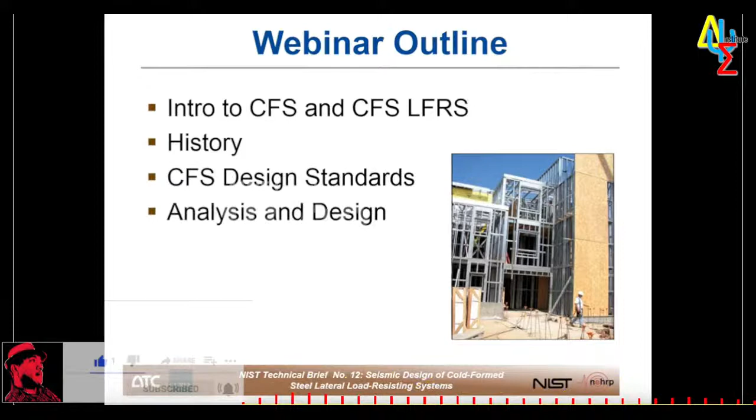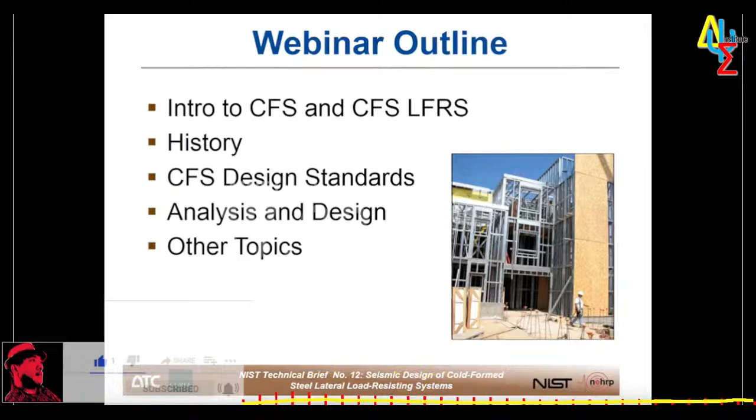Today I'm going to provide a brief introduction to CFS and CFS lateral force resisting systems. We'll talk a little bit about the history of CFS, we'll outline standards, and a good portion of the discussion today is going to be about analysis and design of CFS seismic force resisting systems, which is the main topic of TB12. Other topics that might be of interest to engineers and others, and as we go along, we'll have question and answer sessions.

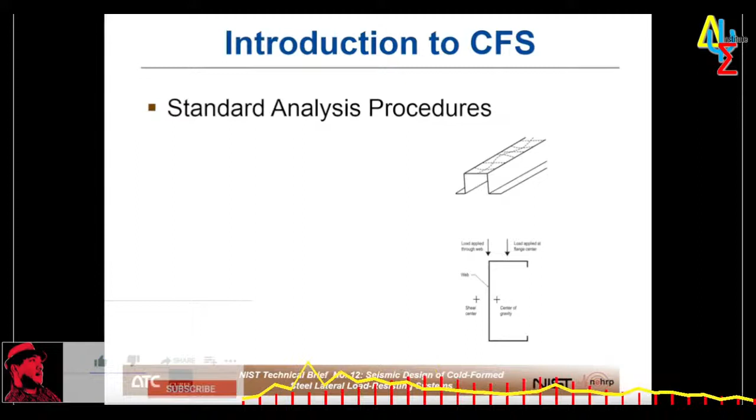Jumping in, the design of CFS members and connections is sometimes considered a little more challenging than other materials, but I think the important thing to remember is that basic mechanics still apply. All of the procedures that structural engineers are accustomed to using can still be used to analyze a CFS structure.

Complexities arise, though, in predicting member strength. In particular, complexities include local buckling, which is a buckling of a flange, a web, or a stiffener plate between or beyond the corners of the shape.

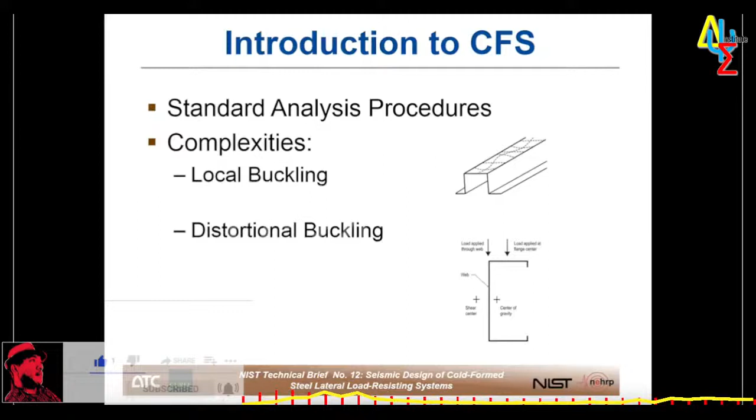There's also distortional buckling, which is a buckling mode where the section distorts, so the corners move relative to each other. Cold-formed steel lends itself to open cross sections such as C shapes, and the shear center of a C shape falls outside the section. So the application of load along a flange, as you can see in the diagram at the right,

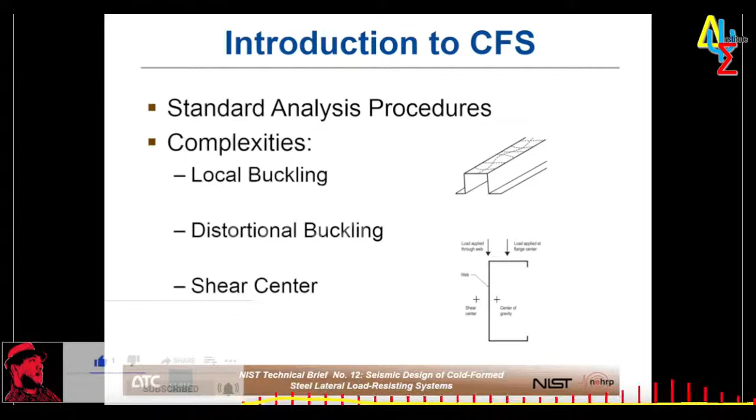can cause torsional stresses if the section is unrestrained. Common CFS construction types include traditional bearing wall structures, with floor joists and roof joists or trusses just resting

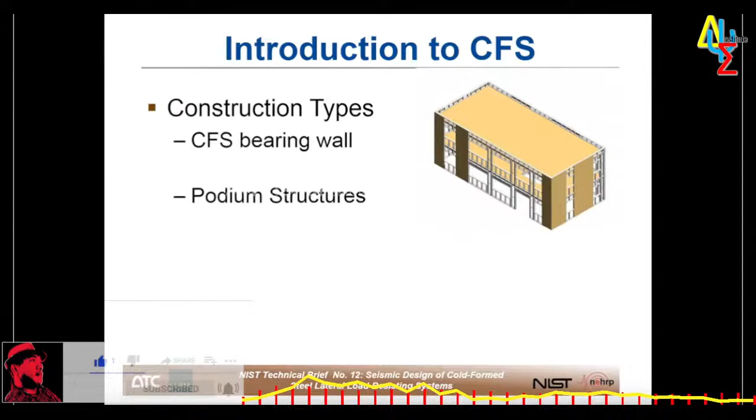on load-bearing studs. Podium-type structures, where a CFS load-bearing structure is actually built on top of a lower-level podium of some other construction, such as concrete or hot-rolled steel. You see this sometimes, for example, with maybe a hotel or residential-type structure sitting on top of a parking structure.

There are also structures with CFS gravity systems that leverage lateral systems of other materials, such as concrete or CMU shear walls, maybe like an elevator or stair core, structural steel brace frames or moment frames. Penthouse structures on the top of taller, maybe concrete or steel buildings, are also common, but those have a different set of loading and criteria, since they are typically considered elements and components rather than part of the main building structure.

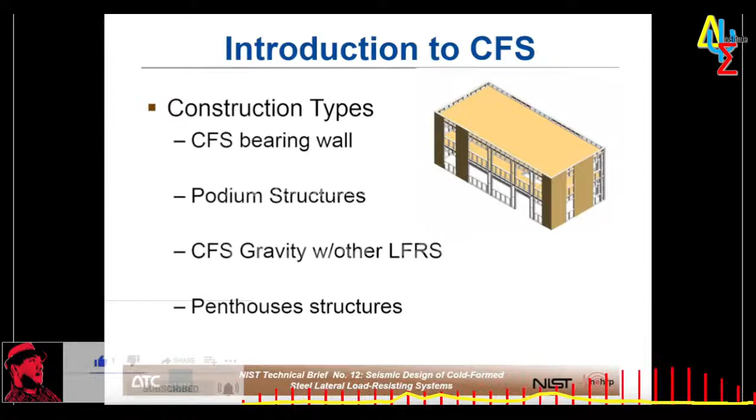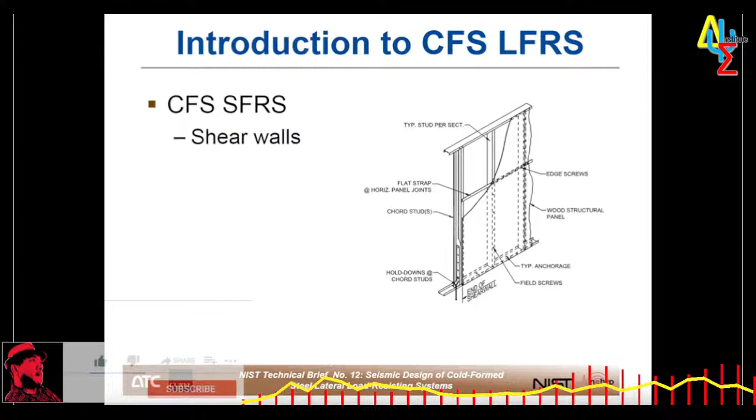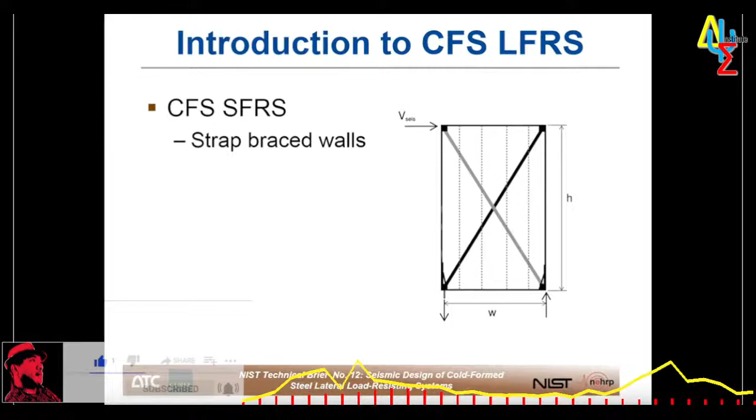Strap brace walls are another common seismic force resisting system. One nice feature of strap braced walls is that they offer a straightforward analysis and design - really simple mechanics to figure out the basic force transfers and so forth in a strap braced wall.

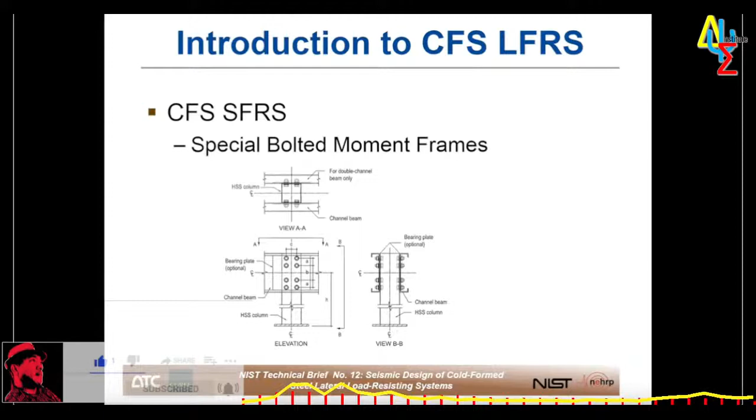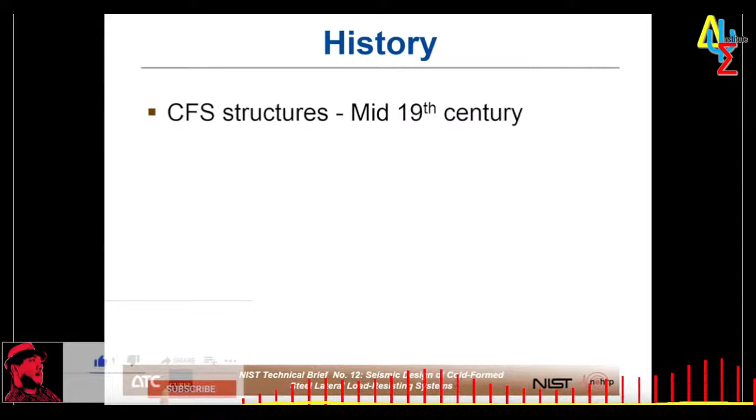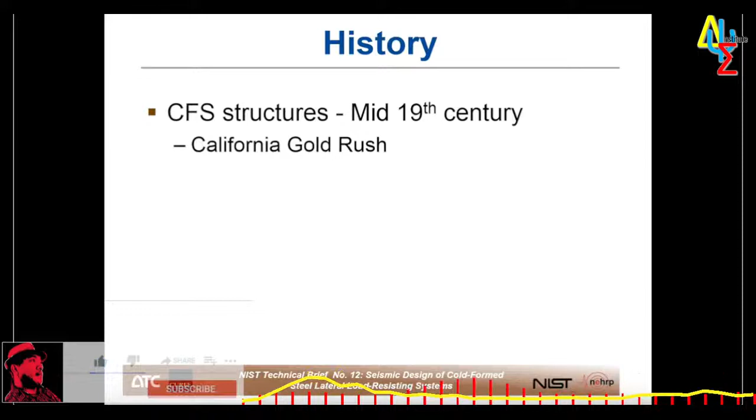With regard to history, cold form steel structures, particularly in seismic design, have become more mainstream in recent years, but the use of cold form steel for building construction has been around since at least the 1850s in both the US and England. During the California gold rush, CFS houses were advertised as being cheaper than wood and fireproof, and could be built in a day. In fact, the 1933 Chicago World's Fair featured a steel-framed house called the Stran Steel House.

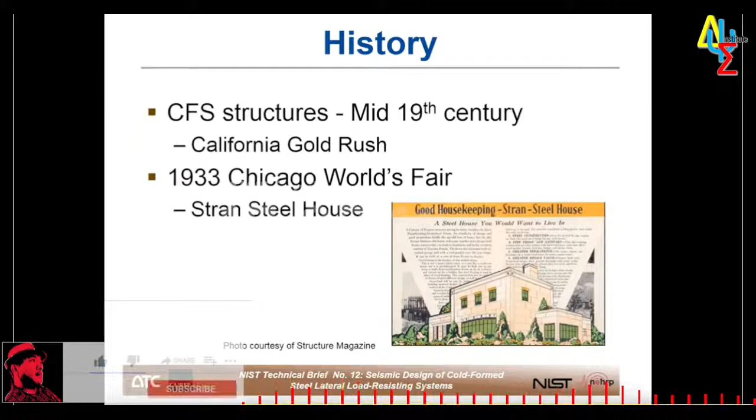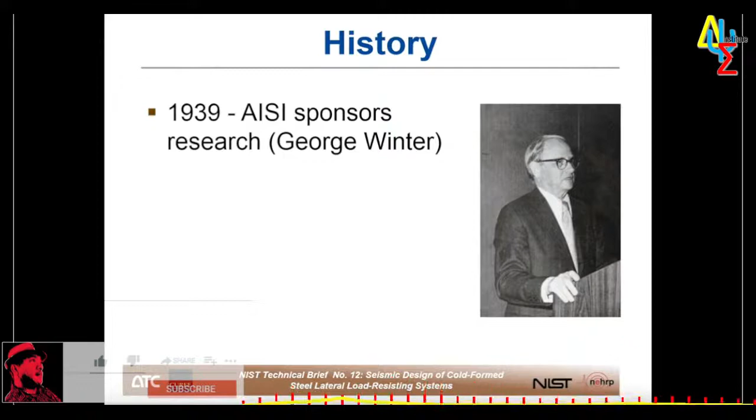Research into the structural behavior of cold form steel started around 1939, performed primarily by George Winter at Cornell University under the sponsorship of the American Iron and Steel Institute. Folks who have dug back into not just cold form steel, but a number of structural topics from the 1930s and 40s, are probably very familiar with George Winter's name. He did an awful lot of work, but most of the early work on cold form steel was under his direction.

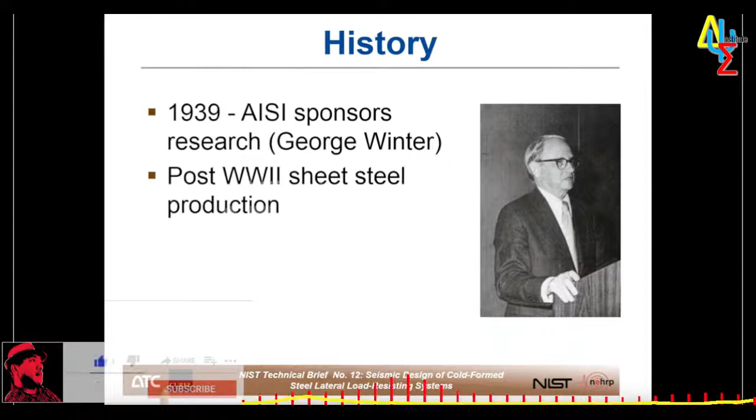The work by Dr. Winter proved timely as World War II came to an end, and the wartime sheet steel production was able to be converted into domestic use. Based on all this early research, in 1946, AISI published its first specification, called the AISI Specification for the Design of Light Gauge Steel Structural Members. That was, of course, the predecessor to what is now AISI S100, or what's sometimes called the NAS spec, or just this AISI spec.

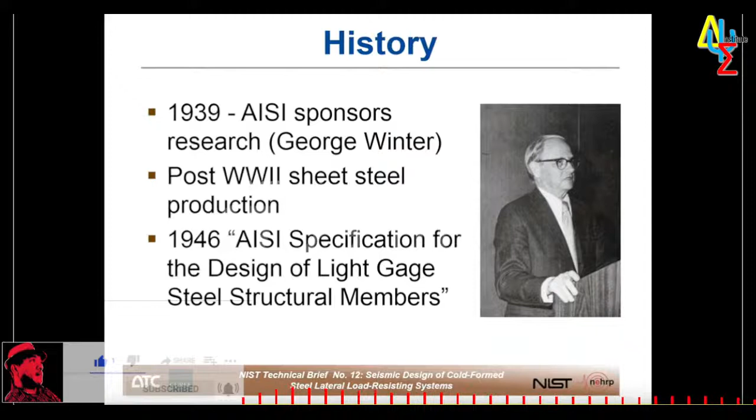In 1947, Dr. Winter published his work on the effective width method, which is essentially a method of predicting the portions of a section that remain effective. Local buckling in a stud, for example local buckling of the flange, doesn't mean that the member has failed - there are stress transfer mechanisms in the section that can provide for significant post-buckling strength. The method that Dr. Winter developed, in its basic form, is still used today for predicting the strength and stiffness of cold form steel members.

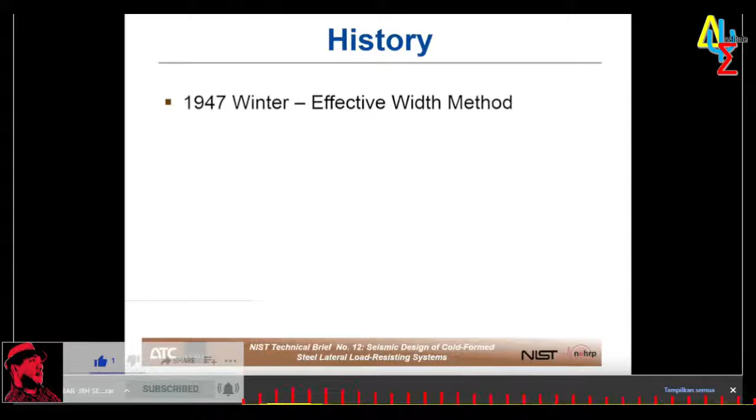The 1950s and 60s saw the use of gypsum products grow, where gypsum board coupled with steel framing began to find acceptance in fire-resistive construction.

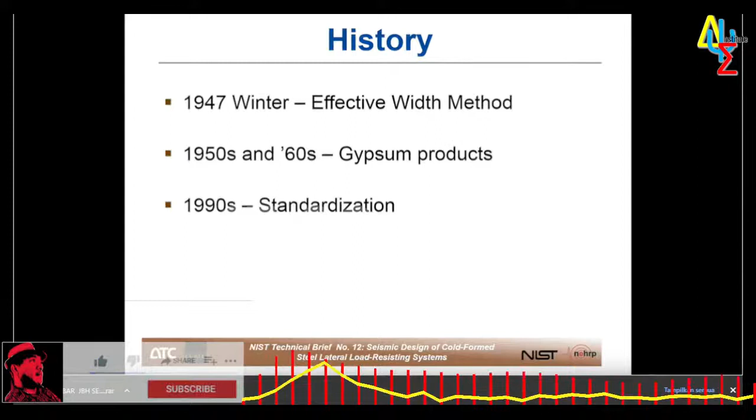In the 1990s, we finally started to see some standardization occurring in the industry. Steel Stud Manufacturers Association, SSMA, was one of the first organizations to recognize the benefit of having standard shapes with common names that designers could specify and builders could buy without the need to pre-select a manufacturer. Anybody around in the early 90s or before may recall that if you were going to specify metal stud, you had to pick one manufacturer and use their nomenclature, shapes, and structural data. But starting in 1990, you could finally specify a shape, and it could come from any number of manufacturers with some assurance that the section would be standardized and meet the specific requirements of your design.

In 1994, the Light Gauge Steel Engineers Association, or LGSEA, was formed. That's now called CFSEI, or the Cold Form Steel Engineers Institute, and it was formed to disseminate technical information and provide design guidance to engineers. In 1998, AISI formed the Committee on Framing Standards to develop standards for design and construction specifically related to the cold form steel framing industry.

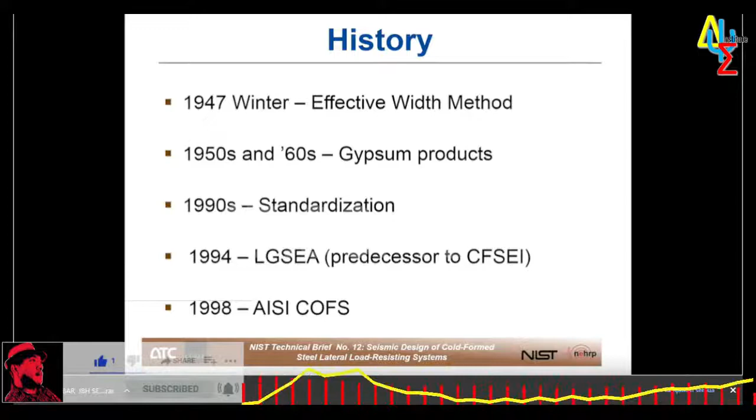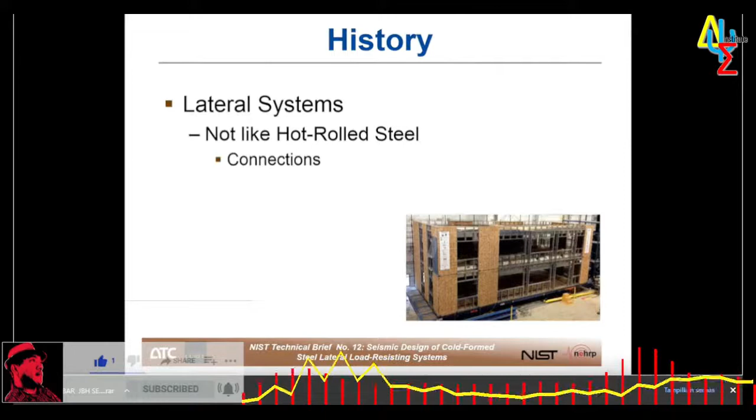The development of CFS lateral systems has been more recent. While the material, steel, used in a CFS lateral system is similar to hot rolled construction, there are a lot of significant differences in design, particularly as they relate to connections. In fact, CFS construction methods and connection types are more like those you might find in wood framing, including the use of repetitive framing, so you get framing members at relatively tight spacings, like 16 or 24 inches on center.

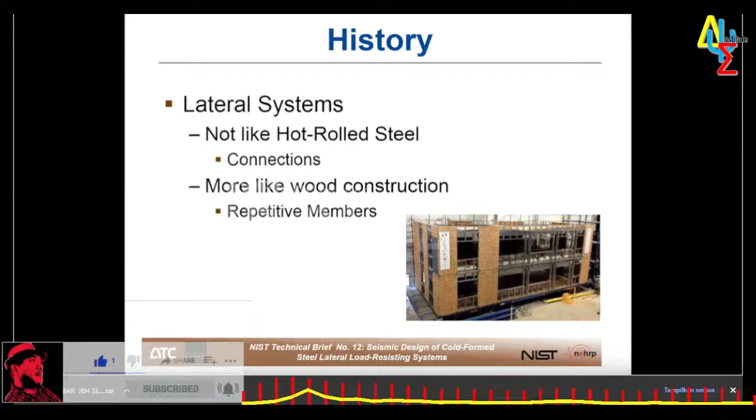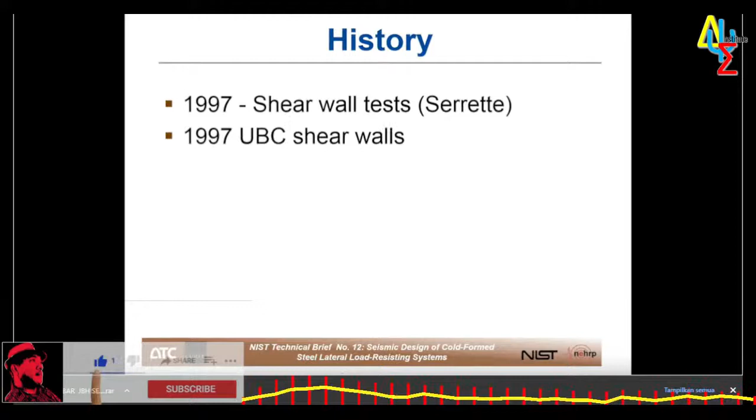Some of the first research into CFS shear walls was completed by Dr. Renaud Serrette at Santa Clara University around 1997. Those shear wall strengths were adopted in the 1997 UBC, or Uniform Building Code, which was the predecessor to the International Building Code, IBC. In 2004, AISI published the standard for cold form steel framing lateral design, which included provisions for wood structural panel shear walls, steel sheet shear walls, and also diaphragms.

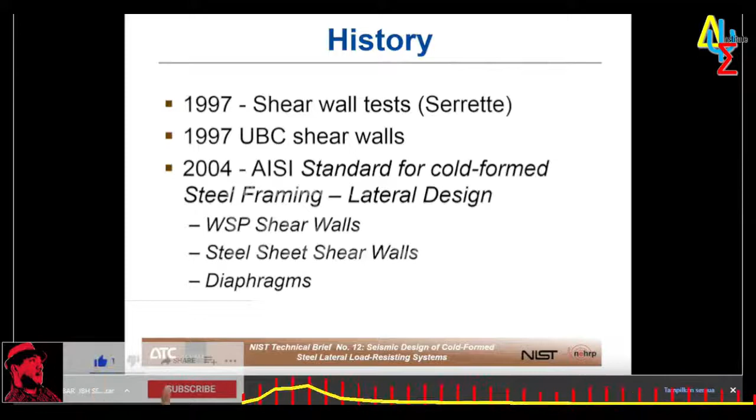Research on these systems has continued, and the standards have continued to evolve as we've learned more. In 2007, AISI published AISI S213, which expanded on the 2004 lateral standard. Then in 2015, the seismic provisions of AISI S213 and AISI S110, the special bolted moment frame standard, were combined into a single dedicated seismic standard, AISI S400. Since that time, S400 has been updated, first with a supplement, S1-16, and then to S400-20. These updates reflect what we learned through additional research and input from users of the standard.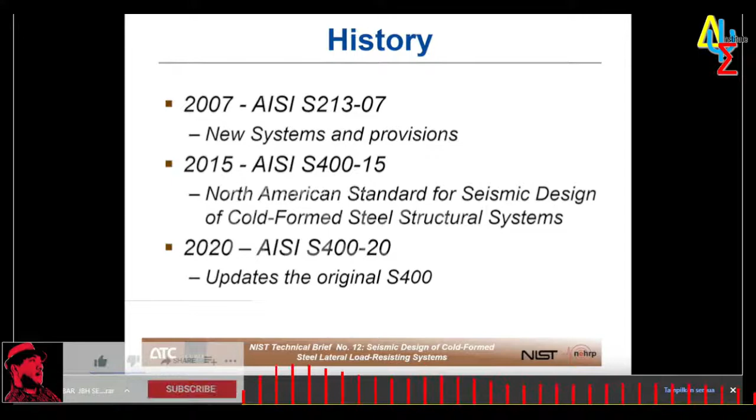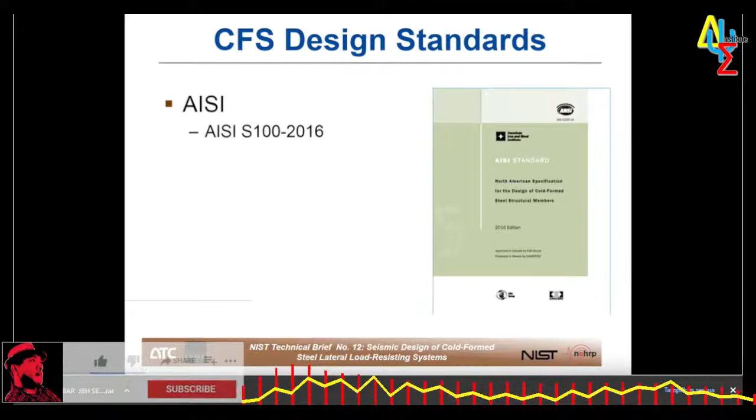AISI actually publishes most of the technical standards for the design of CFS members and systems. First and foremost is AISI S100, the North American specification for the design of cold form steel structural members. You may be familiar with this document as just the AISI spec or the NAS spec, but in more recent times people have become accustomed to calling it S100. It provides methods for predicting member strength and stability, and also includes provisions for the design of connections.

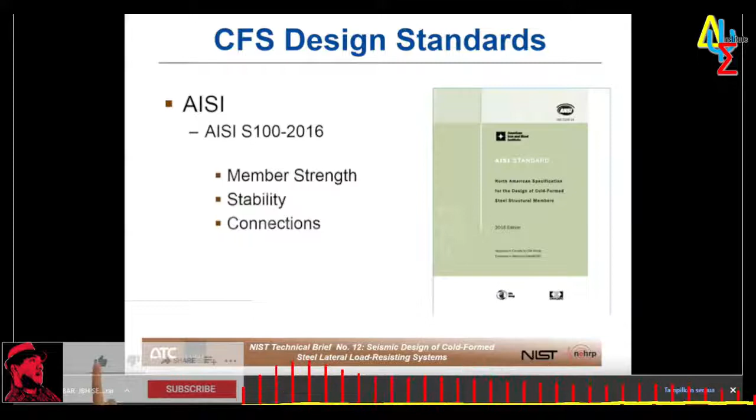AISI also publishes a number of standards to address industry issues specifically related to cold form steel framing. AISI S201 is a product standard that addresses material and product requirements for both structural and non-structural members. S202 is the code of standard practice, which addresses design, fabrication, and installation of CFS structural framing.

S230 is a prescriptive standard which provides requirements for the design of residential structures up to 3 stories in height. Generally this is not for use in determining engineering designs so much as for unengineered systems where a builder can use the standard without necessarily going through all of the engineering processes.

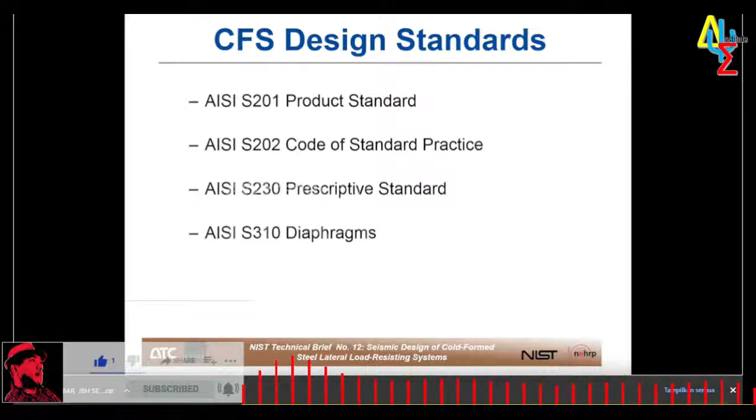S310 applies to horizontal and vertical diaphragms using profiled steel panels, and it provides the strength and stiffness of the diaphragm membrane. It doesn't provide design of the full diaphragm system, so keep that in mind if you're turning to S310. All the information you need to look at the diaphragm membrane and its connection to the structural members is in there, including strength and stiffness provisions, but it won't tell you, for example, how to design a collector, or chord forces and those sorts of things. For those you would refer back to, say, an S240 or an S400 for additional guidance.

Test standards for a variety of members and assemblies are provided in the S900 series standards. These and other standards are available for free download at cfsei.org. I'd like to note the printed version of this presentation had an error in that.

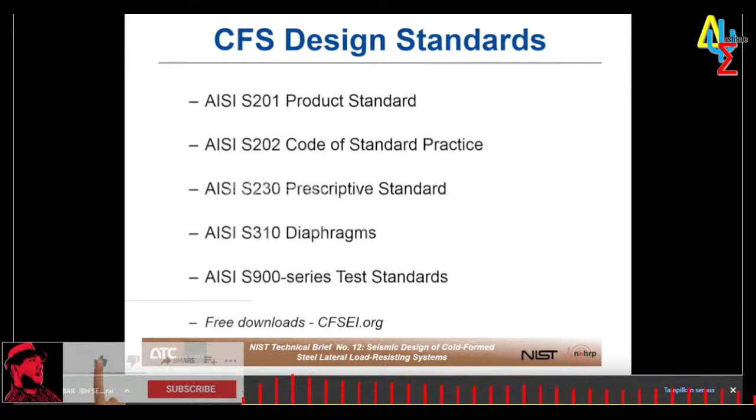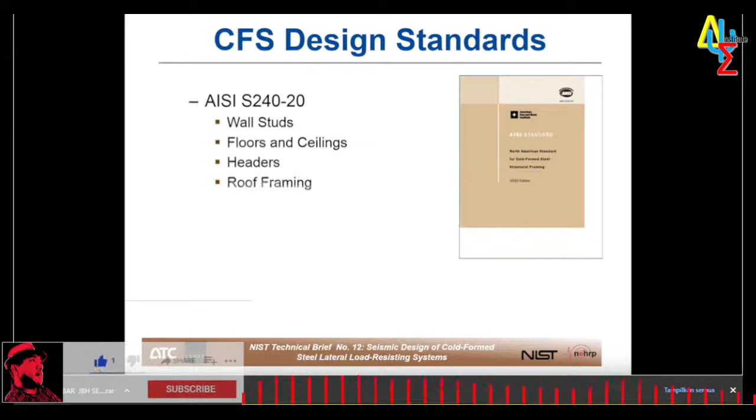If you've got your printed version handy, cross out AISIstandards.org and write in cfsei.org. AISI S240 is the North American standard for cold formed steel structural framing, recently updated in 2020. That update became available just a couple weeks ago. If you go to cfsei.org and look for the free standards downloads, you can find the most current version of S240. S240 consolidated a number of earlier design standards, including standards for the design of wall studs, floors and ceilings, headers, roof framing, and the wind and low seismic design of lateral systems.

When we say low seismic, we're talking about seismic design categories B or C with a seismic response modification factor R equals 3. Sometimes folks think it should be R less than or equal to 3, and it's kind of a weird setup, but it is actually very specifically R equals 3, and there are a few reasons for that with regard to a particular system in ASCE 7 that uses R equals 3. But for practical purposes, low seismic design category B or C, R equals 3. If you're there, you can use S240.

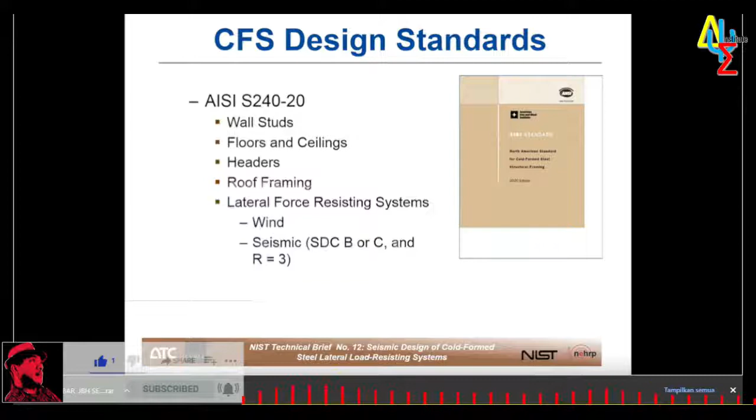If not, you've got to go to S400. So the AISI standard most relevant to technical brief TB12 is S400, the North American standard for seismic design of cold formed steel structural systems. TB12 happened to be based on S400-15 with supplement number 1, S400-15/S1-16. S400-15 combined the high seismic provisions of S213 and the special bolted moment provisions of AISI S110.

One of the goals in developing S400 was to provide clarity and uniformity in the design provisions for CFS seismic systems. Anybody that spent a lot of time digging through S213 might recall that while the provisions were all there, they were sometimes hard to find and not necessarily organized in a way that made it conducive to understanding exactly what requirements might be applicable to your particular system. S400 went a long way towards streamlining that process so it was a lot easier to understand the requirements and perform your designs.

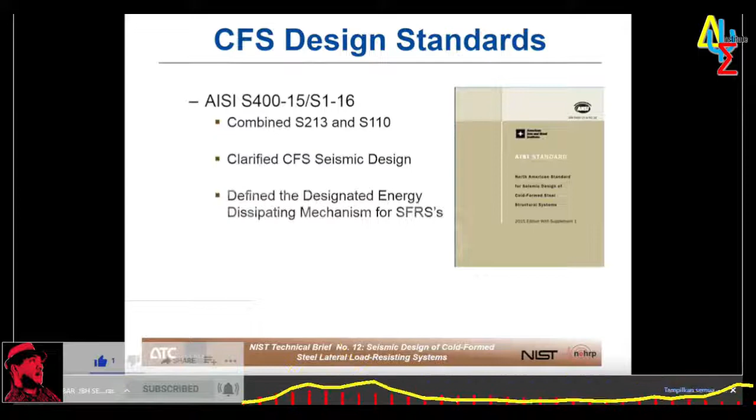That was largely accomplished by specifically defining the designated energy dissipating mechanism for each seismic force resisting system and providing a consistent design approach and language for each of the systems.

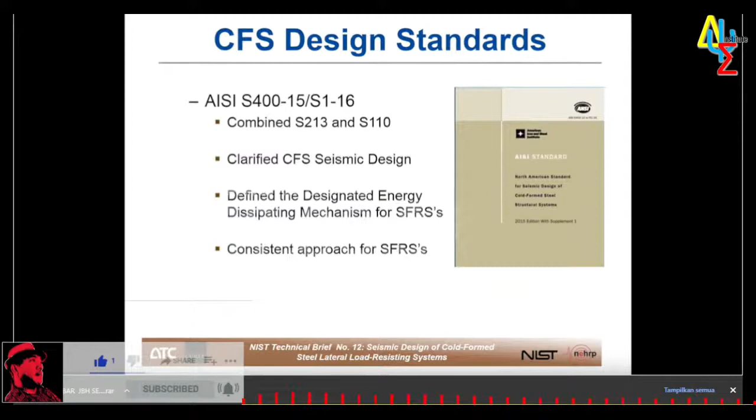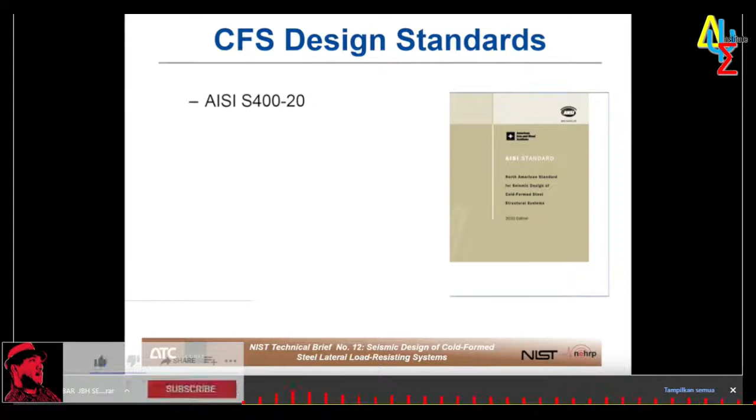S400-20 is the second full edition of S400 and includes a number of clarifications and a few substantial technical updates. One of the things we did was provide a better definition for capacity protected components, replacing what we called at AISI the lateral laundry lists of protected items, which was repeated over and over again in various provisions. It's much easier to read now and understand what parts of your seismic force resisting system require capacity protection.

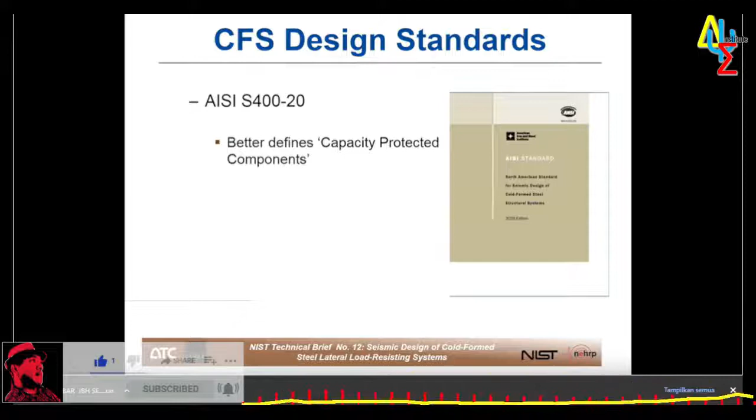The drift limitations for CFS buildings with concrete or masonry walls were updated to directly reference ASCE 7. S400 has always used capacity-based design principles, but the specified value of the expected strength factor, omega E, is what we use in S400 for shear walls. In earlier versions, overstrength always controlled. When doing a seismic design, S400 would tell you that you could use the lesser of expected strength or forces from the applicable building code with overstrength, but it turned out overstrength forces would always control.

So S400-20 adopted a more realistic approach that determines expected strength based on the expected strength of the seismic force resisting system itself, and additional strength that results from the attachment of finishes such as added layers of gypsum board, plaster, or EIFS. Steel deck diaphragm provisions were also added in Chapter F of S400-20, including methods that could be used where special seismic detailing is required by the applicable building code.

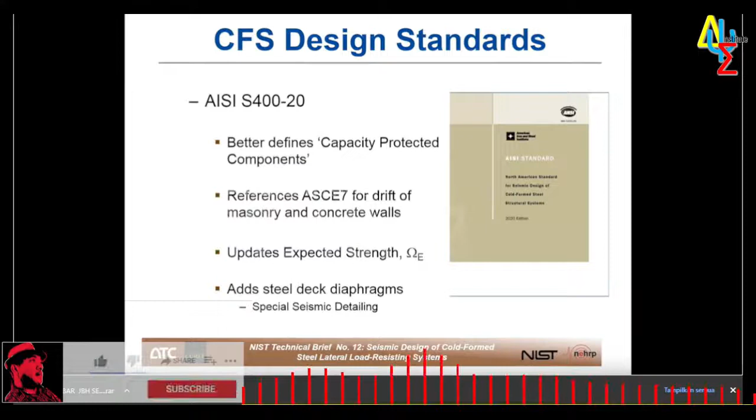ASTM also publishes a number of standards relevant to CFS design and installation, including ASTM C645.